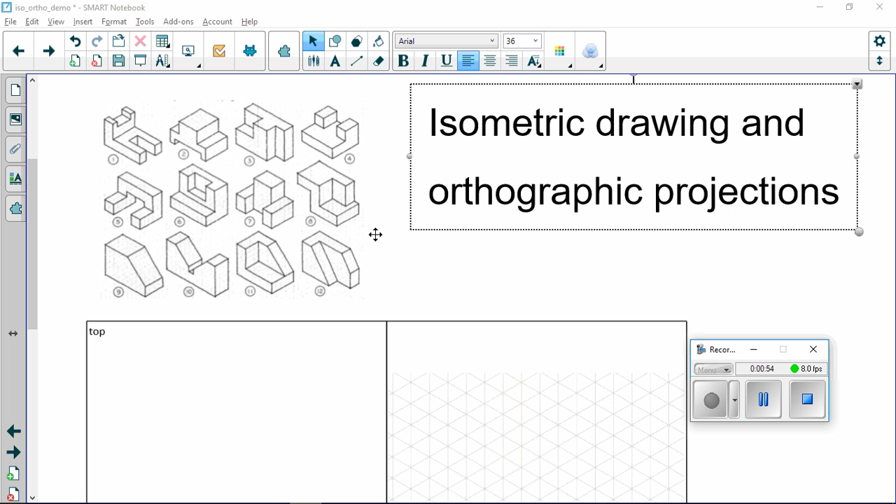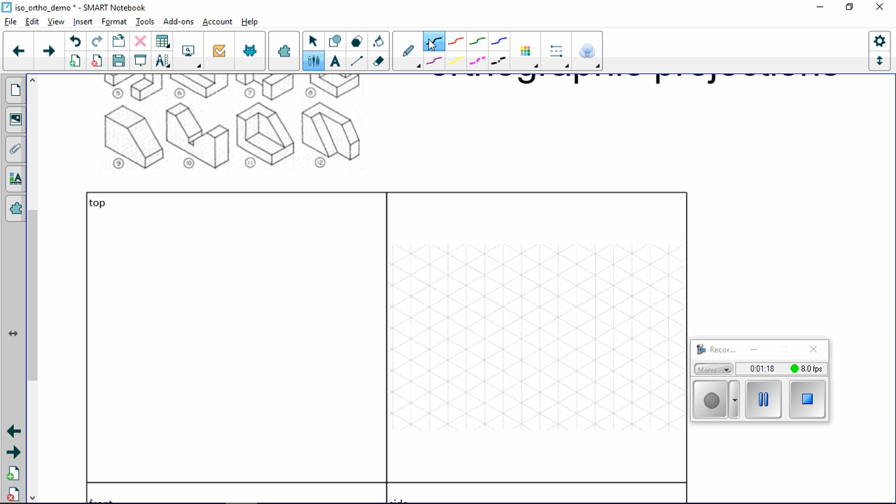So a line that's farther away from the observer is going to have the same size as a line that's close to the observer if they are of the same size. You'll see as I get going. So I'm going to start out by drawing example number 1. So example 1 that you can see right here, I'm going to draw it in isometric. The first step is I'm going to draw what we call a crate. So the crate is going to be basically a box that's drawn around the area where I'm going to draw the figure.

Now, as you can see, I'm following the lines on my isometric paper. And the way this paper works is these lines are all 30 degrees from the horizontal. So if you were to draw a line straight across the horizon and then angle it upward 30 degrees, that would give you all of these lines here. So all lines that would be parallel to the ground are actually drawn as 30 degrees.

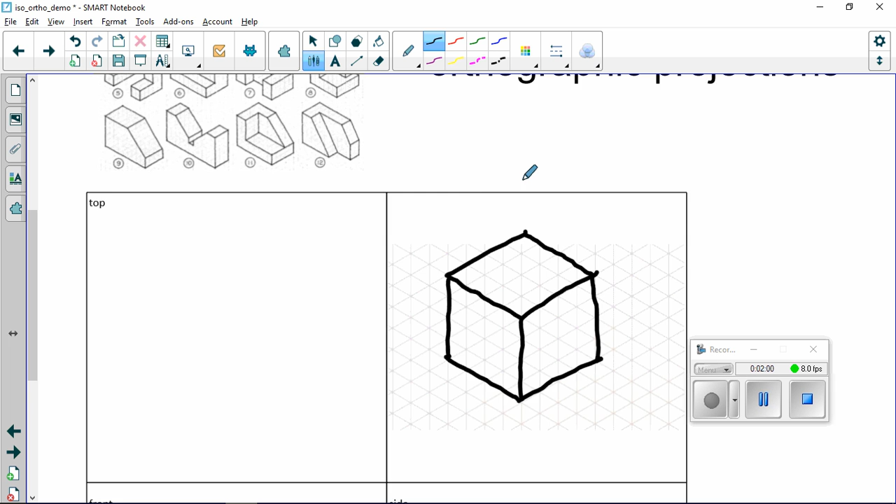So now I'm doing figure 1, and I'm going to draw it just as it is here. So actually, let me rotate it just to sort of show you how this works, so I'm not just straight out copying. So instead of looking at it this way, I'm going to rotate it so we're looking at it from the other side here. So I'm going to essentially make cuts from my crate by following those lines. So again, the crate is this box that I've drawn around it.

And notice I'm following my isometric lines. Any vertical line should go straight up and down. And any horizontal line should be along these faint lines that you can see that are all 30 degrees from the horizon. And now if I look at my example I'm drawing, I've got to cut out those rabbit ears at the top, and I've got to cut out this part in the bottom as well. So this part I'm going to cut out in the bottom. Notice how I'm going to follow my isometric 30-degree lines for my horizontal lines. And then these vertical lines, I'm going to draw them perfectly vertically.

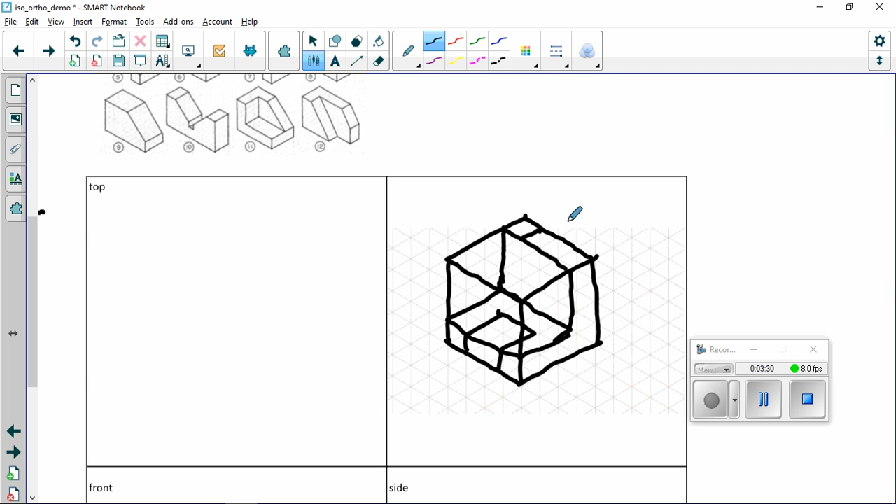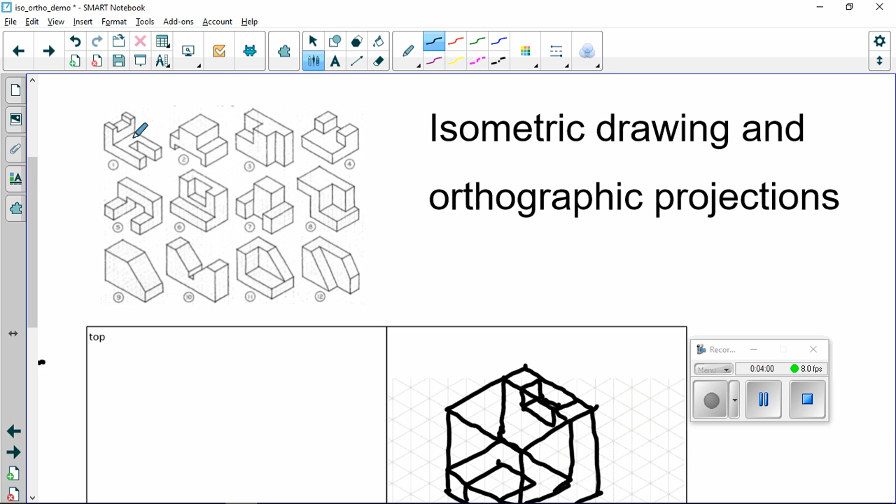And now for the rabbit ears at the top, I'm going to follow this line here, this one there. And I'm going to come straight down here, straight down there, straight down here. Okay. So now you can see I have almost all of the lines that are required. I've taken this object here and I've rotated it. Looks like that is almost 180 degrees if we're looking above clockwise. And now I'm going to erase the lines on my crate, and the figure is going to take shape.

So let me grab my eraser. And make that eraser a little bit smaller so I can do this as cleanly as possible here. Now I may have to erase a few more lines than I want to. I'm going to have to just fill them back in.

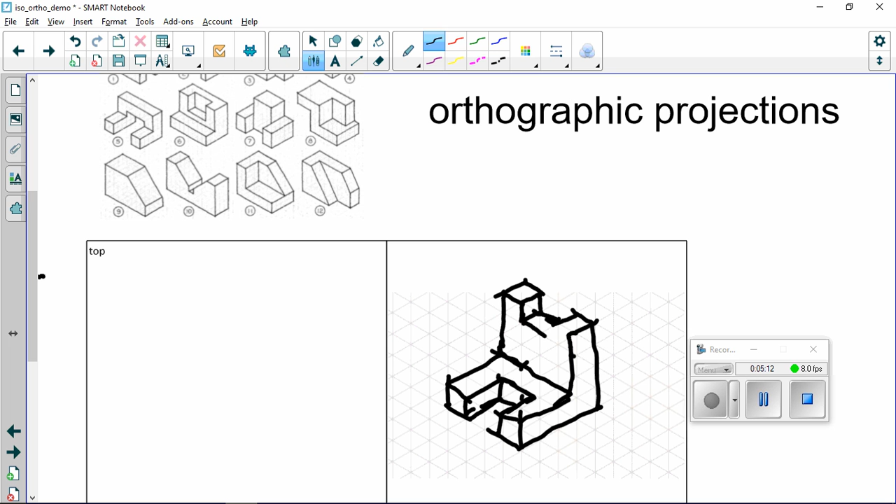Now, obviously, if you're using a computer, you'd use CAD, that's computer-aided design. You'd use something like AutoCAD or Onshape or Solid Edge to draw something like this. And I'm just trying to use the computer to show you how you would draw this freehand. There you go. So what we have now is an isometric drawing of this view here. A couple of things to remember. One, the closest thing to you is the edge, not the flat part of the crate. You draw a crate completely around the object, and then you slowly make cuts in the crate until the 3D figure you're drawing emerges.

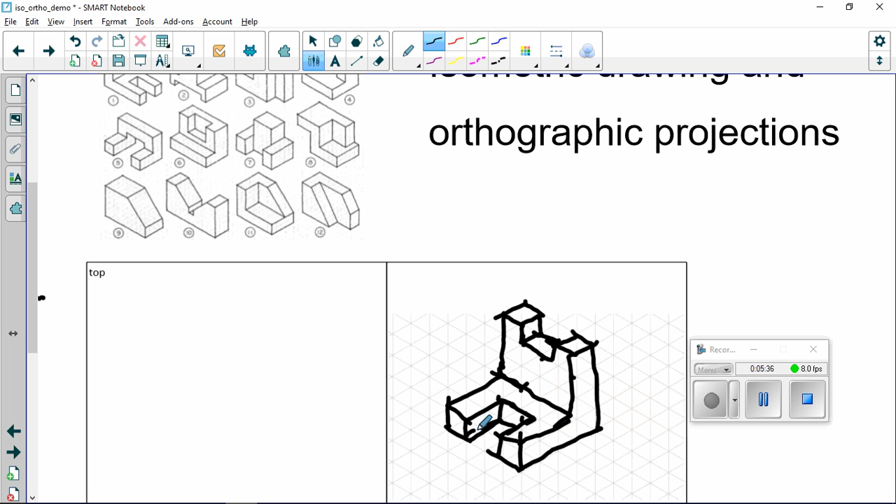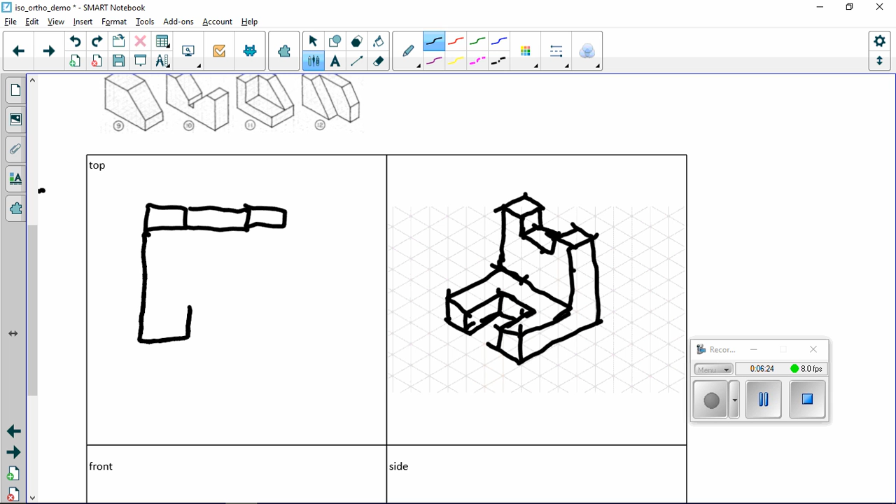Now, I'm going to draw the top view, the front view, and the side view over here. So from the very top, if I was to look at this from the top down, what I would see is, these are my rabbit ears here. And here's the middle part. That's the top view. And then this base, so this portion right here, I'm going to draw this portion right here. And when I look at it from the top, it's going to look like this. So that's my top view.

Then when I look at this from the front, so that is when I look at it viewing this way, let's say the eyeball's here, and I'm viewing the front. I'm going to see those rabbit ears. And I'm going to see the feet, and the feet are going to look just like squares. And then I've got to draw this middle part here.

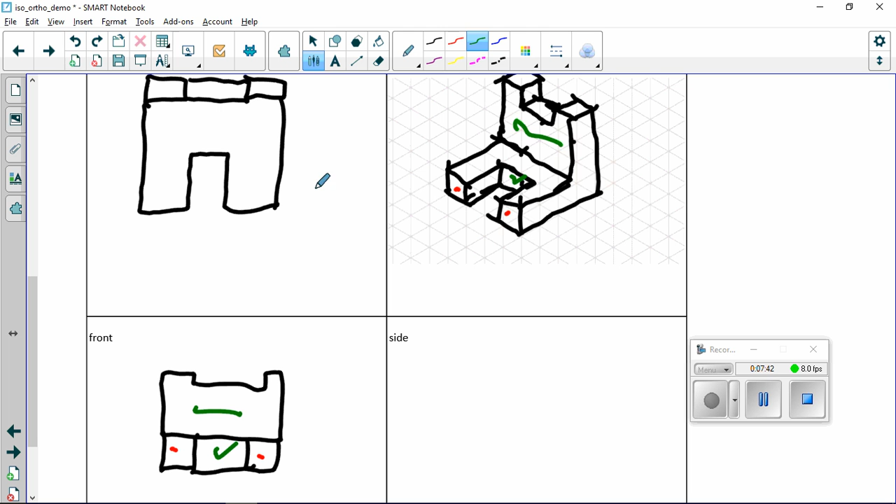So notice what I've drawn. These are these spots here. And right here, this is this part here. And right here is this part here. That's all you would see if you were to rotate this around and view it from the front. And finally, the side view. And if I'm looking at this from the side, all I'm going to see is a backwards L. So what I'm looking at right here is this portion right here.

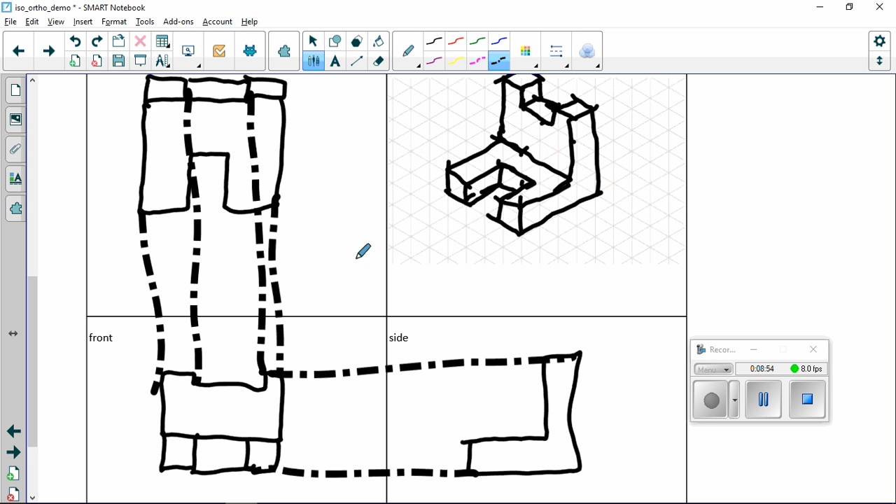Now, taking your time and using a pencil and a ruler, what you really should do is line up, the top should line up with the top as you look from the side to the front. And this should line up with this. And the dimensions of, say, this ear should match this ear, and that ear should match that ear. You should take your time to get all of those things. Now, if I use the computer to do that, it's not really going to be realistic with respect to your hand drawing. That's why I've not done that. I can redo this afterwards using these lines to show you exactly what it should end up looking like, but that's not really the same process as doing this by hand.

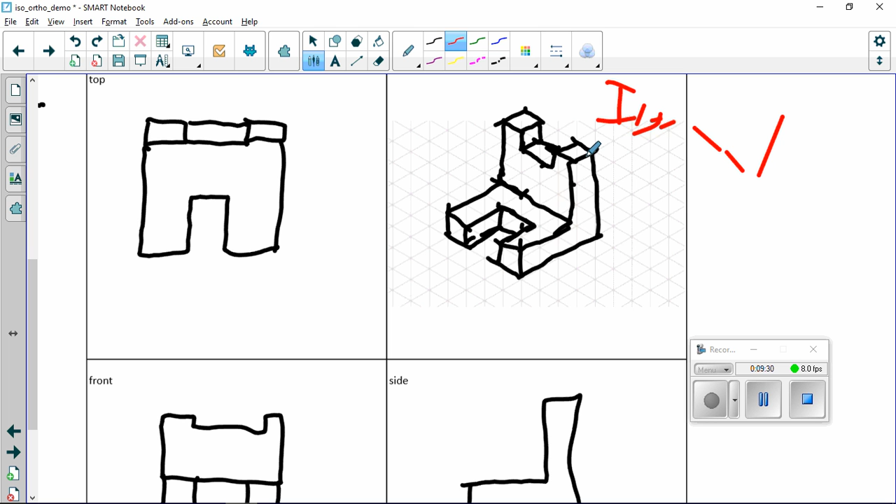So again, this is called isometric. So isometric is, yeah, it's not letting me write. Isometric is a three-dimensional drawing where a line that's far away or a line that's close have the same actual dimension. There's no perspective in this. It's not artwork. It's a construction drawing. And the orthographic projections show the top, the front, and the side view, and they don't show any 3D depth. They're just a flat view from different sides.